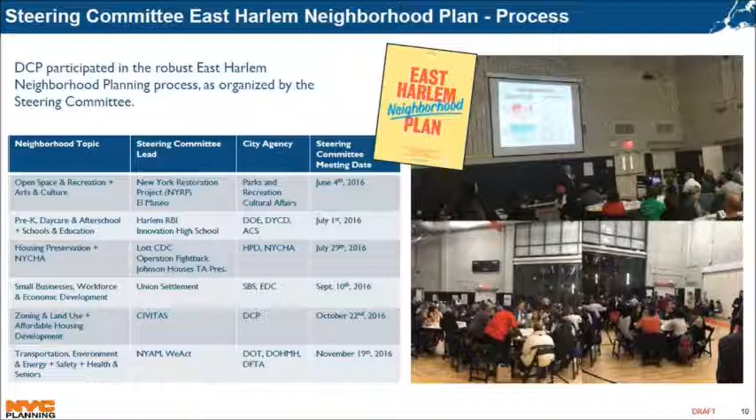And as you can see by the dates here, these are the various and numerous meetings that city agencies attended with community members to discuss some of the issues and concerns that were being raised by the community. As a result, there were 200 recommendations that were included.

And as you can see, these are the various topics that were included in the neighborhood plan. So the recommendations fell under these different topics. And as Eric stated earlier, this process differed from our other neighborhood studies, where it was an effort led by the community. They invited us in as city agencies to participate in this community-led process, which was very helpful, because through this process we were able to engage with the community and hear directly what these concerns were under these various neighborhood topics.

So now we'll talk about our approach. Once this plan was issued, the action that the city took.

Once the plan was issued, the engagement didn't stop. A lot of the agencies that were involved in the plan, that went to these meetings, continued to meet with the subgroups to discuss and come up with a plan of action for how the city can take actions for some of the recommendations included in the plan. These are our agency partners that participated in these subgroup meetings and continue to meet with the steering committee once the plan was issued to the city.

The amazing work that went into this plan provided a clear lens for the city to understand the work we needed to do in Harlem, as well as to identify how we need to use this plan as a guidepost for how we take action. In the next couple of slides, I'm going to walk through the recommendations included in the plan and highlight the work already underway by some of the agencies as an outcome of this ongoing engagement process.

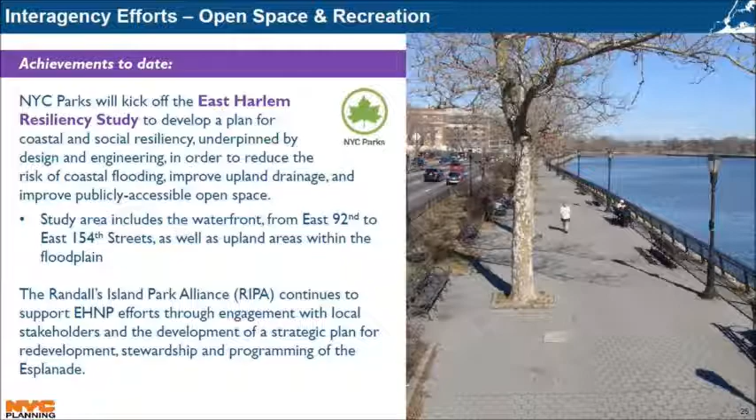In terms of transportation, environment, and energy, there were 6 recommendations included in the East Harlem Neighborhood Plan, focused on pedestrian safety and transportation infrastructure.

One of the projects mentioned by our colleagues at SBS is the plaza at East 125th Street. We find this to be a very important node for the district and for 125th Street itself, given its regional transportation potential. We want to make sure this is a good plaza that is being used and that people can access it safely.

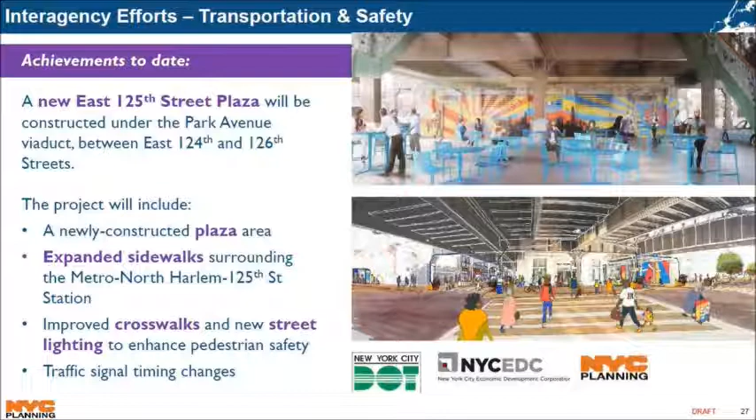There are improvements being made for the connections around this plaza to make sure it's safe, improving the timing of signals for access, and access between the Metro North Station and the plaza. There are also improvements along the Park Avenue Viaduct to ensure safety at various crossings, including curb build-outs and lighting in the tunnel, as well as improving services along the SBS Select Bus service line.

And then the last set of recommendations covers small business and workforce. I won't spend much time on this because our colleagues at SBS did a great job talking about the work they're doing in East Harlem.

But I just want to highlight the East Harlem Commercial District Needs Assessment. We took a look at these commercial corridors within East Harlem, identifying key issues and opportunities so that working with the community and our interagency partners, we can improve these corridors and make sure they are...

...at their full potential, as well as highlighting the new Workforce One Center, a satellite center that will be located in East Harlem to provide access and information about jobs that may be available to residents.

At this point, I'm going to turn it over to my colleague Eric to talk about our rezoning proposal. I just want to highlight that we're being responsive to the recommendations, and we want to show where we're aligned with the East Harlem Neighborhood Plan, and the other areas where we build off those recommendations to really take this targeted approach in East Harlem. So I'll turn it over to Eric now.

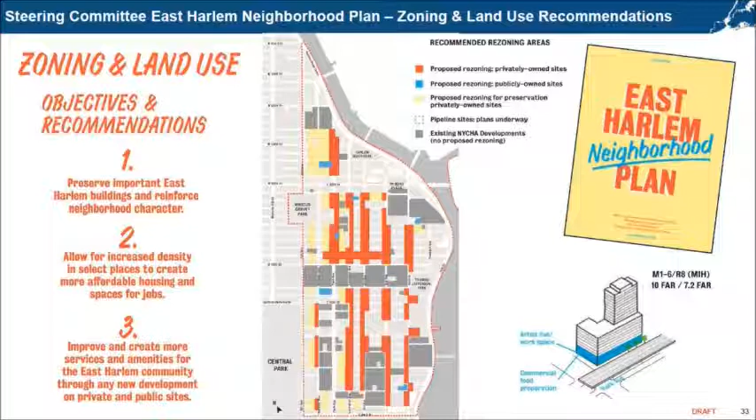It included several maps, helpful graphics, detailed tables, charts, as well as massings that helped illustrate their preferred building forms. On the bottom right corner of the slide, you can see a massing included in the community's plan. This shows a massing they would suggest for Park Avenue with a 10 FAR non-contextual building form featuring commercial food preparation and artist-live workspaces on lower stories adjacent to the rail.

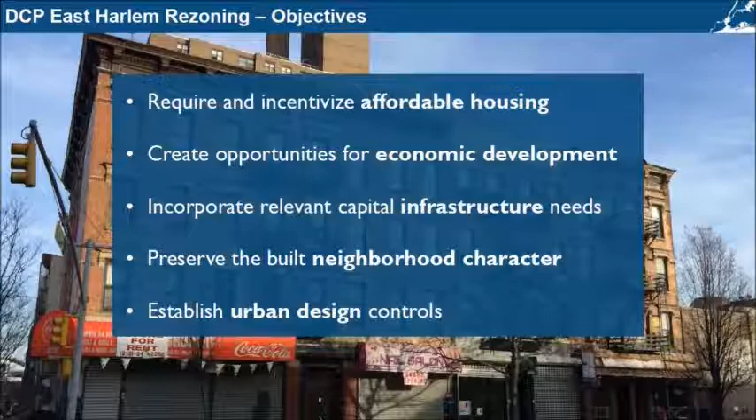I want to give another reminder of our objectives for our rezoning proposal here. As you might notice, these objectives are quite similar to the objectives in the community's plan. We had also a major focus on increasing affordable housing through MIH, creating opportunities for economic development and jobs, and preserving the built context and character of the neighborhood.

We took a similar approach when we received the recommendations and began our work. We started with a look at the entire neighborhood, pretty much all of Community District 11, with the exception of Randall's Island. We conducted several analyses of existing land uses, buildings, and zoning under a variety of scenarios. These rounds of analysis really allowed us to hone in on specific opportunity areas. Many of these areas had a combination of outdated zoning and also real opportunity for the zoning actions to result in new housing, jobs, and economic development.

We think this is a sensitive, balanced, and responsive plan. Just by looking at the map, I think it's clear that we have not employed a broad brush approach here. We've gone block by block, really, to look at existing conditions and develop zoning moves that address our shared objectives with the Steering Committee in a very fine-grained way.

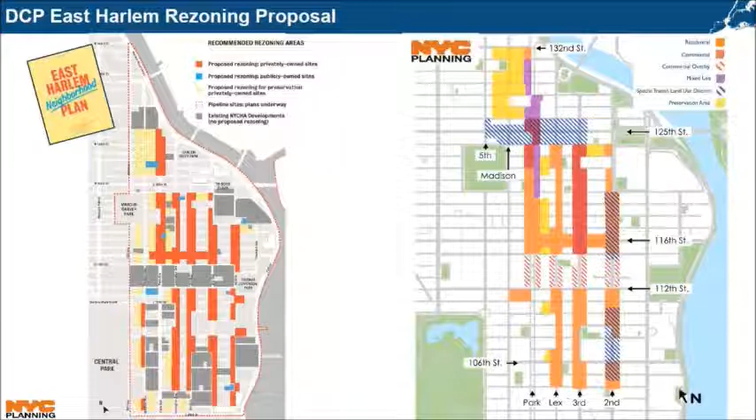Let's go ahead and dive in by taking a look at the Park Avenue corridor. Along Park Avenue, we've developed a mixed-use approach that takes advantage of one of the neighborhood's main assets, which is the transit node at 125th and Park, where the Metro North has a station and where the future 2nd Avenue subway terminus will be located.

This is an area that could become a major commercial center for Upper Manhattan and for the region as a whole. Our proposal would allow existing businesses to expand and would also permit new job-generating uses to locate near this transit hub. We proposed several higher density districts at 125th Street, radiating to the north and south for several blocks. Beyond those points, we proposed lower density districts, both to the north and to the south.

There are light manufacturing activities here today, and we believe these uses should be able to expand. We also believe that new light manufacturing, office, life science, and other commercial uses are particularly appropriate for Park Avenue. We've actually gone a step further here, and in many areas are actually requiring that a portion of new buildings contain these types of uses. The zoning will essentially guarantee that Park Avenue is a truly mixed-use area.

Of course, the zoning also permits housing, and as in all areas where we're proposing increased density, the mandatory inclusionary housing program will be mapped here to require permanently affordable housing.

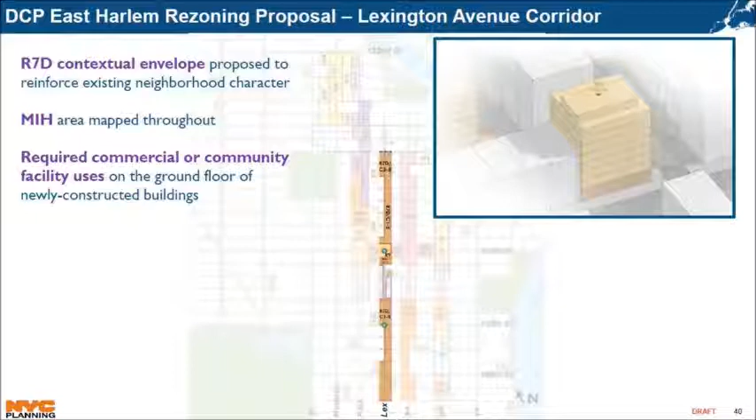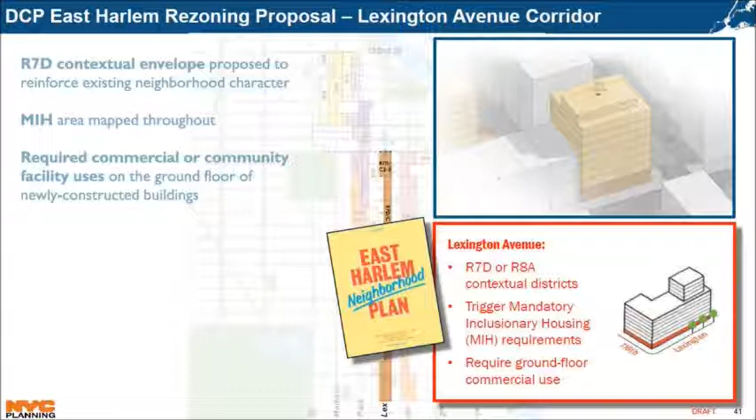The massing included in the community's plan rises to approximately 12 stories, with the bulk of the floor area located in the base of the building. We've also included other steering committee recommendations for MIH and required ground floor commercial use, though our proposal would also allow community facility on ground floors.

So moving on to 116th Street. Similar to Lexington Avenue, we proposed R7D along much of East 116th Street, with the exception of the avenue intersections. Recall that buildings in R7D districts rise no taller than 11 stories.

As I mentioned a moment ago, we proposed a higher density district. We proposed an R9 district at the intersection at Lexington Avenue, adjacent to the existing 116th Street stop on the Lexington Avenue Local 6 line. The illustrative massing here shows developments that we could expect at that particular node.

Under the proposed non-contextual R9 district, we could expect buildings ranging from 9 to 17 stories at this node. This transit-oriented strategy is consistent with our general approach of selectively targeting density in areas of opportunity close to transit. We've also proposed the same ground floor commercial or community facility requirements seen elsewhere in the rezoning area, in addition to MIH.

Again, with the exception of the avenue intersections, we more or less mirrored the recommendations for 116th Street in the steering committee's plan. Note that while we treated the intersection of Lexington and 116th Street a bit differently than what was recommended in their plan, the steering committee has been quite receptive to a higher density at that particular node. Along the mid-blocks, we arrived at the lower of the two densities suggested by the steering committee, with the same MIH and ground floor commercial requirements suggested for Lexington Avenue.

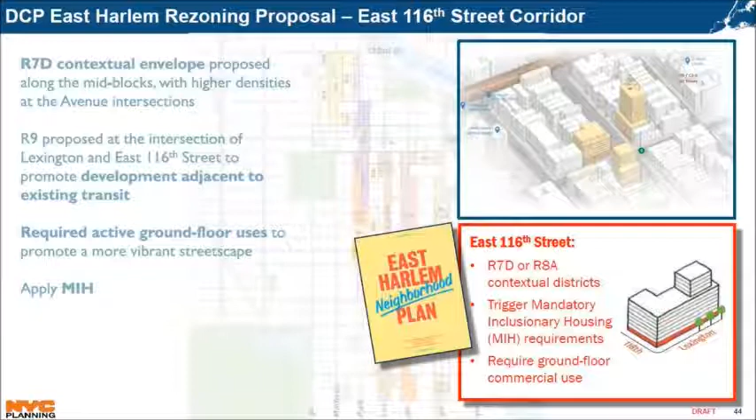So next we'll focus on the 3rd Avenue corridor.

As we've mentioned previously, Third Avenue has a wide street condition and is located just one block away from subway stations planned for Second Avenue. We found that these unique conditions contribute to the avenue's capacity to accommodate additional density, and we believe it's appropriate to map higher density in these areas of opportunity adjacent to existing and future transit options.

As you can see in the massing on the top right in the blue box, you can see a few buildings that we could expect to develop under the proposed R10 and R10 equivalent densities. Using reasonable development assumptions, no development on Third Avenue would be expected to exceed the height of the Taino Towers development, which tops out at about 330 feet. We would expect most buildings along Third to rise to between 15 and 30 stories.

For the northern section of Third Avenue, our proposal would maintain the existing commercial density, permitting the same uses as existing C4 districts mapped along the corridor today. Upper story commercial and community facility uses would continue to be allowed under our proposal. We've also proposed enhanced commercial regulations that will reinforce the existing retail character of the corridor and create a more desirable pedestrian environment. These include requirements for transparent materials on storefronts, restrictions on curb cuts, limitations on the width of residential lobbies, as well as the previously mentioned requirement for ground floor commercial or community facility.

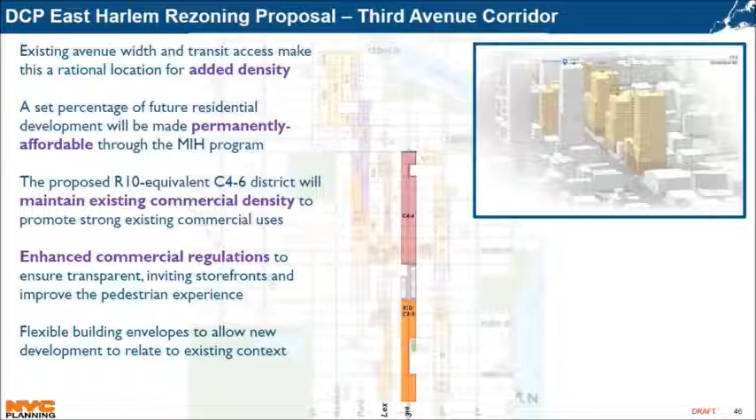The steering committee recommended either R9 or R9A districts along most of the corridor, and considered either R9 equivalent or R10 equivalent commercial districts closer to the 125th Street corridor. As you can see in the community's plan massing on the bottom right here in the red box, the massing is approximately a 20-story building with a tower and base-like form.

Density along Third Avenue was one of the primary differences between the steering committee's recommendations and our proposal. Our analysis really drove home that Third Avenue was the area with the most opportunity to achieve the goals we share with the steering committee. The corridor will be located between two major transit lines once the Second Avenue subway is up and running, and the scale of the avenue can easily accommodate buildings that are more proportional to the width of the avenue. We selected lower densities in other locations with a higher density on Third Avenue to arrive at a balanced plan that we believe would best accomplish the larger package of objectives we share with the steering committee.

In any case, the steering committee's recommendation to map MIH along Third Avenue would be implemented with our proposal, as would their recommendation for enhanced commercial requirements.

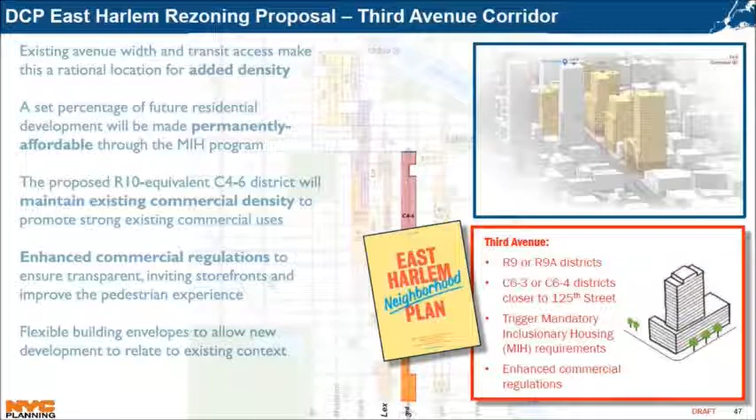Moving east to Second Avenue, we proposed R9 districts with MIH requirements in existing R8A districts along Second Avenue.

We also re-examined the special transit land use, or TA districts, that were originally mapped along the avenue in the 1970s. As a reminder, these districts are intended to relate new development to future subway infrastructure. We updated the locations of the TA districts in East Harlem to match the MTA's current plans for the Second Avenue subway. We also amended the TA district text to exempt floor area related to subway infrastructure from zoning calculations, which encourages mixed-use developments that include subway infrastructure within the building, with the added benefit of making the streetscape more desirable for pedestrians.

Typically, extra height is needed to allow buildings with lower story subway infrastructure to utilize their full as-of-right floor area. You can see the massing in the upper right in the blue box; this is what a building could look like with that subway infrastructure on lower stories along Second Avenue. While this particular building would rise to about 25 stories, we would expect most buildings along Second Avenue to rise to between 8 and 18 stories.

Could I just ask, what's the southern boundary? The southern boundary is East 104th Street. Wonderful, thank you.

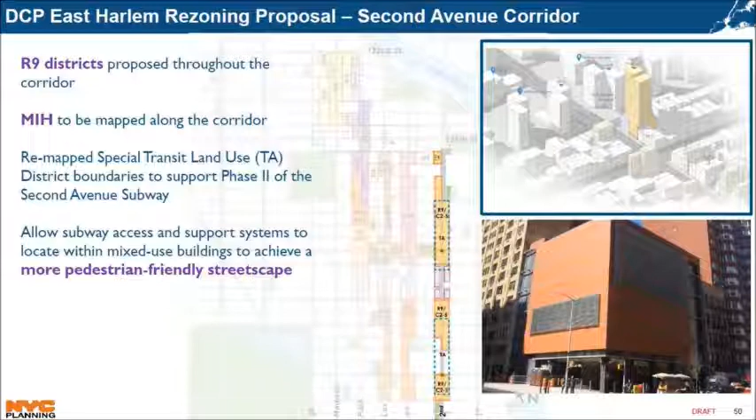So here on the bottom right, we've included an image of standalone subway infrastructure that you can see further south on Second Avenue and the Upper East Side. Note the blank building walls, which have a negative effect on a vibrant streetscape, and you can also see there's a lost opportunity for upper story residential units here. Our proposal is really designed to avoid this type of infrastructure in East Harlem.

So the steering committee again recommended R9 or R9A districts along this particular corridor, going further to recommend higher density commercial districts closer to 125th Street. In the red box, you can see that the steering committee prefers the same sort of 20-story tower and base massing that we saw for Third Avenue.

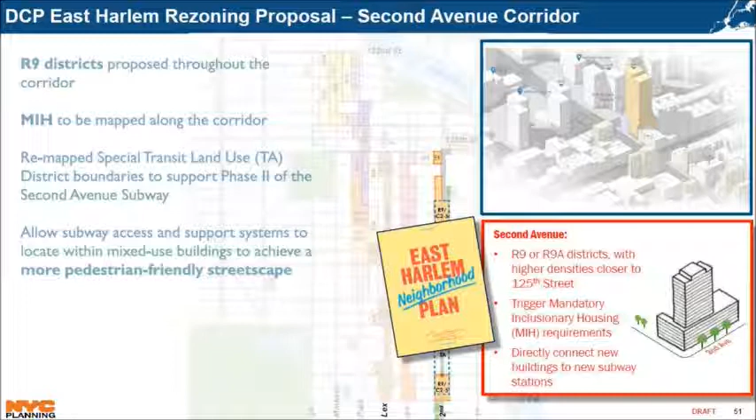We actually decided to maintain that R9 equivalent density on the northern portion of the avenue, where the steering committee contemplated either R9 or R9A due to changes in the planned locations of Second Avenue subway platforms. Our proposal includes non-contextual R9 districts for Second Avenue, one of the options proposed by the steering committee. We concluded that contextual districts would make it difficult to construct mixed-use buildings featuring subway infrastructure, and we found that flexibility here is really needed to accomplish our infrastructure goals. Nonetheless, contextual building envelopes would still be an option here. Other community recommendations related to MIH and subway connectivity have been addressed by our proposal.

Do we know approximately how many people live in the area now? In the entire neighborhood? In the entire area that we're discussing? In the entire neighborhood, there's 120,000 residents.

But I'm not sure what percentage of them would you assume is in an MIH mode? Or putting it differently, what percentage of those 120,000 people would there be who are currently not at area median, that are under area median income? Is that... so we have a slide,

I'll tell you where I'm going. You got 120,000 people in the area now. At anticipated build-out, if the proposed plan were passed, how many units would there be? So our increment is close to 3,500 new dwelling units that would be coming to East Harlem.

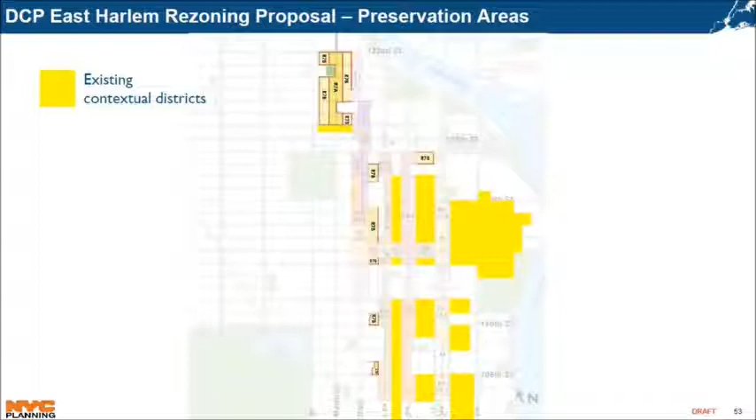You can see the combination of our proposed preservation areas, and in the highlighted yellow color, you can see the existing contextual districts that exist in East Harlem. These districts were primarily mapped during the 2003 rezoning effort, and as you can see, they cover a significant chunk of the eastern portion of the neighborhood. Combined with our proposal, these ensure the preservation of existing building form throughout a very large swath of the neighborhood and in the most appropriate areas.

As I just mentioned, we propose contextual districts to preserve neighborhood character and also to prevent development that could be inconsistent with the established scale and context of these areas. We propose R7A districts along wide streets, with R7B districts along narrow streets, as these districts were intended to be mapped. These proposed preservation districts provide a counterweight to the rezoning approach in other areas of the neighborhood, contributing to a balanced overall plan that recognizes areas with a consistent and unique local character.

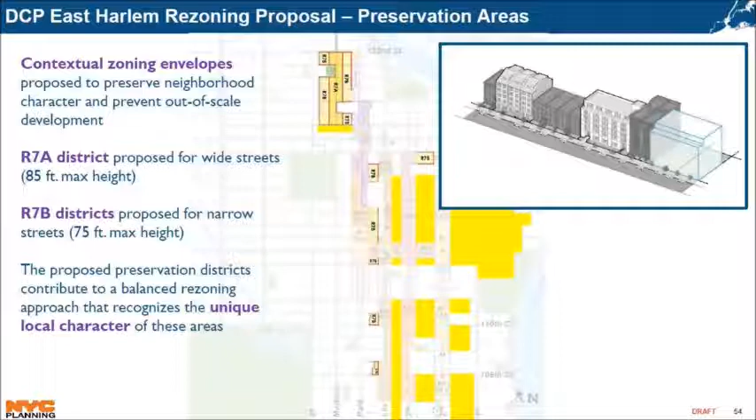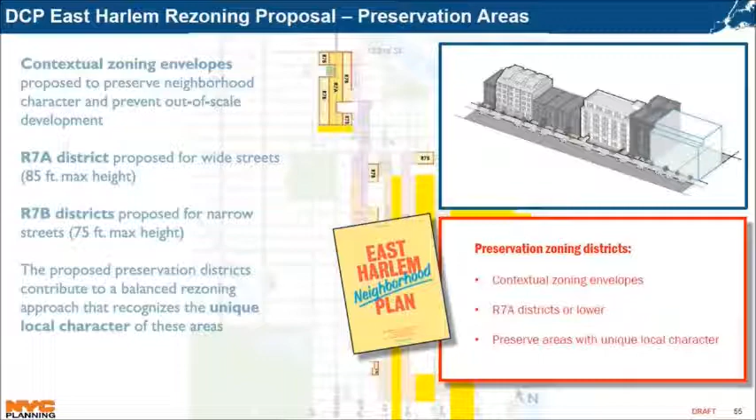Within these areas, the community's plan called for contextual zoning as well, specifically R7A districts or lower. Our proposed mid-block R7B districts have a lower density than R7A, which was only proposed along Madison Avenue. Again, we were respectful of the steering committee's recommendations here, going so far as to propose a lower density to ensure the desired preservation outcomes would be achieved with a more sensitive approach. Particularly when combined with existing contextual districts in East Harlem, our preservation recommendations are another strong component of our balanced and targeted plan.

So I'll quickly finish this section with just a rundown of the proposed actions. I will not talk about these very much. You have a lot of information in your packets. If you have any other questions, we're happy to answer them.

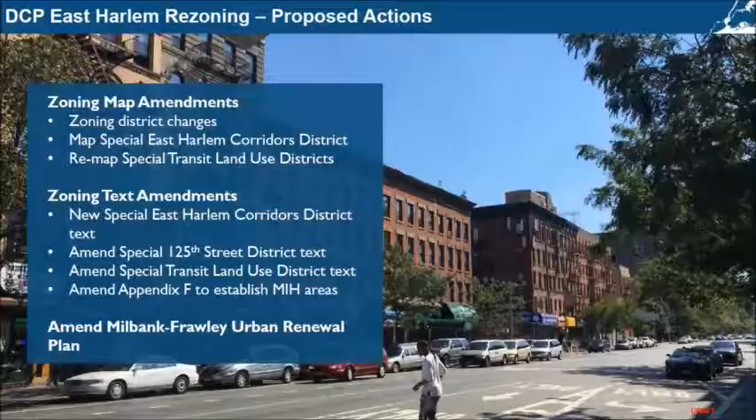All right, thank you. So this is coming back for pre-hearing. During the public review process, which was a very passionate process, I will say, very passionate, Community Board 11 held two public hearings, one at the beginning of the process and one at the end. On June 20th, at their public hearing, they issued a resolution to disapprove with conditions. The Manhattan Borough President held a public hearing on July 16th.

And following on August 2nd, issued a resolution to disapprove. Many of the community board conditions and comments noted in the borough president's resolution overlap, and they fall into several broad categories, which I'll go through in these slides.

First, going over the zoning and land use recommendations. The recommendations were to generally limit increase in density to R9 equivalents. There were comments about geography of the zoning changes, with several recommendations to include certain areas in the rezoning boundaries and others to exclude areas that were included, and include areas that were excluded.

And then there were also comments about the retail regulations, parking garage regulations, and relocation of subway stairs at a single subway stop, specifically at the East 116th and Lexington Avenue node.

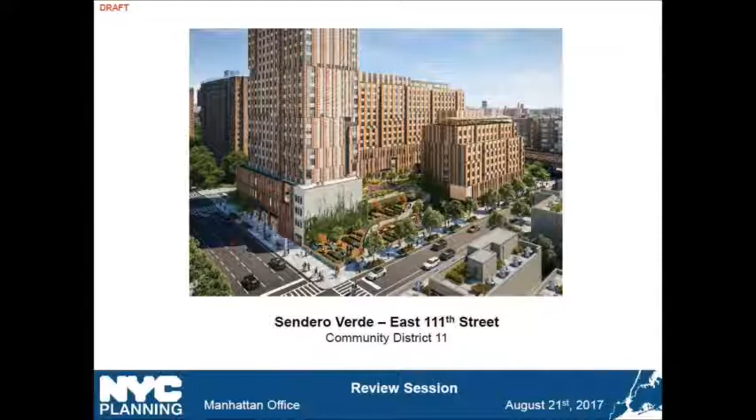Good afternoon, Commissioners. This is an application by the New York City Department of Housing Preservation and Development for a number of discretionary actions, which will be discussed in greater detail later in the presentation, to facilitate the development of 3 mixed-use buildings with residential, commercial, and community facility uses.

The project area is an entire block bounded by Park Avenue, East 111th Street, Madison Avenue, and East 112th Street, and is currently zoned R7-2 with C1-4 commercial overlays on the Park and Madison Avenue frontages.

The project area contains approximately 76,576 square feet of lot area, and the majority of the project area is contained within city-owned parcels, as shown outlined in red. The remaining 2 lots located on the project area are privately owned and are not part of the development site. Lot 21 is improved with a single 4-story building, and Lot 34 is currently utilized for surface parking and storage.

In prior years, part of the development site was used as a baseball field by the East Harlem Little League under a temporary license agreement with HPD. The license agreement expired in October 2016, and the East Harlem Little League has obtained a permit through the Parks Department to play on a nearby Parks Department field. The lots previously licensed to Little League are currently vacant.

The development site currently contains 6 interim Green Thumb community gardens located on city-owned parcels along the Park and Madison Avenue frontages. These interim gardens operate under a temporary license agreement with HPD and have allowed for garden-related activities until a viable development scenario can be achieved for the site.

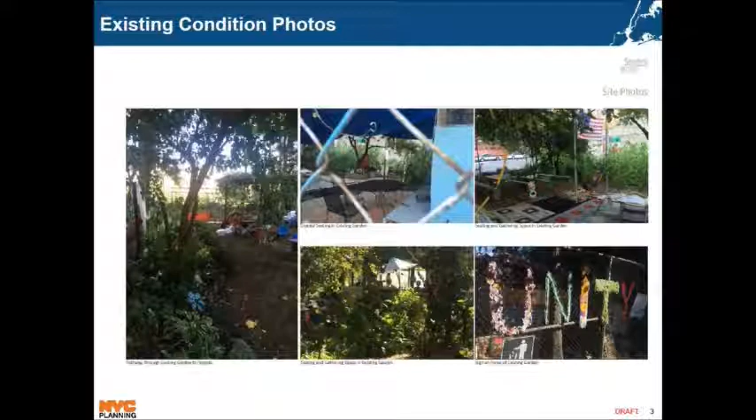The proposed development includes the construction of 3 predominantly residential mixed-use buildings on the development site, ranging in height from 10 to 37 stories. The proposed development will occupy all frontages on the block not otherwise owned by the non-city-owned parcels discussed previously.

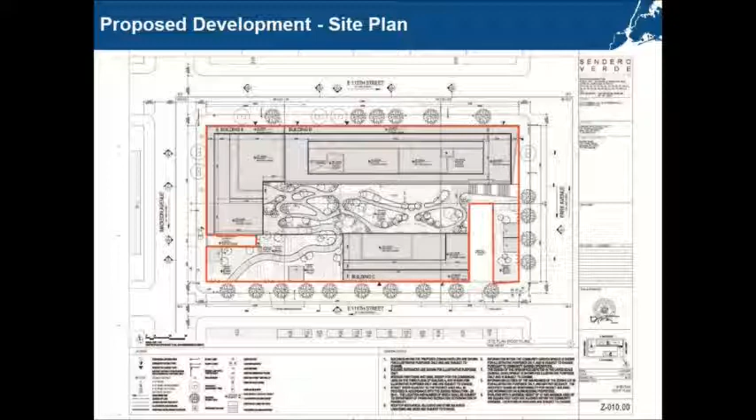In total, the proposed development contains approximately 718,500 square feet of floor area, of which approximately 544,000 square feet will be residential, 32,200 square feet will be commercial, and 142,200 square feet will be community facility floor area.

The 3 predominantly residential buildings will contain approximately 655 affordable housing dwelling units, with a proposed mix of 152 studios, 243 one-bedrooms, 161 two-bedrooms, and 99 three-bedroom units. The units will provide housing for individuals and families at a mix of incomes between 30% and 130% of Area Median Income, or AMI. No accessory parking will be provided as part of the proposed development.

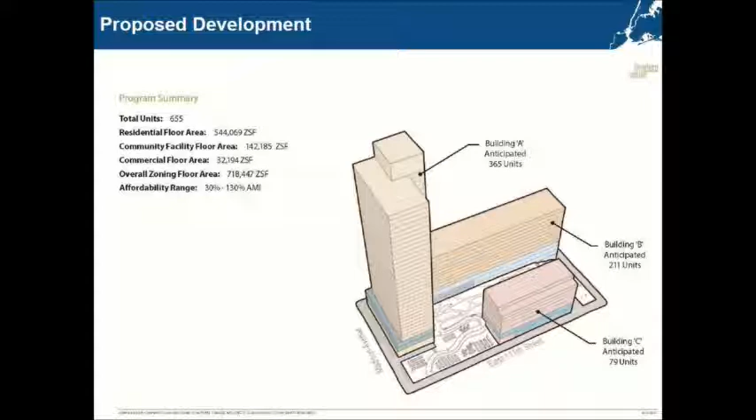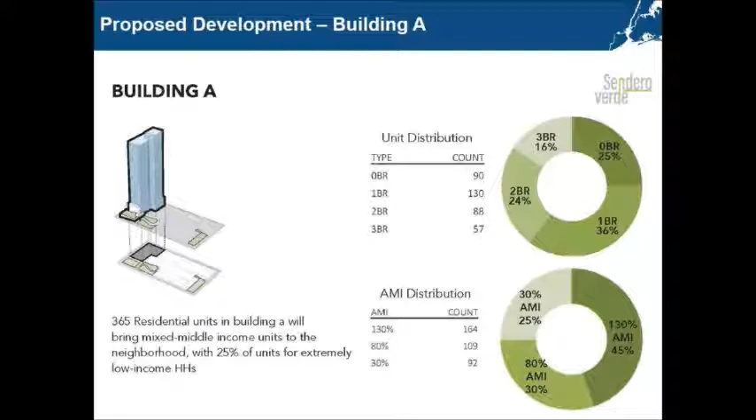Building A is proposed to be located at the intersection of Madison Avenue and East 112th Street and is proposed to rise to 37 stories. Building A will contain approximately 365 residential units, as well as community facility floor area and commercial floor area, which will include a local supermarket. Of the 365 residential units, it is proposed that 164 units will be provided at 130% of AMI, 109 units at 80% of AMI, and 92 units at 30% of AMI.

Building B is proposed to be located along the remainder of the East 112th Street frontage and wrap along the Madison Avenue frontage for a depth of approximately 72 feet, rising to a height of 15 stories. Building B will contain approximately 211 residential units, as well as community facility floor area, which will include the Dream Charter School. Of the 211 residential units, it is proposed that 127 units be provided at 60% AMI, 30 units at 50% AMI, 32 units at 40% AMI, and 22 units at 30% AMI.

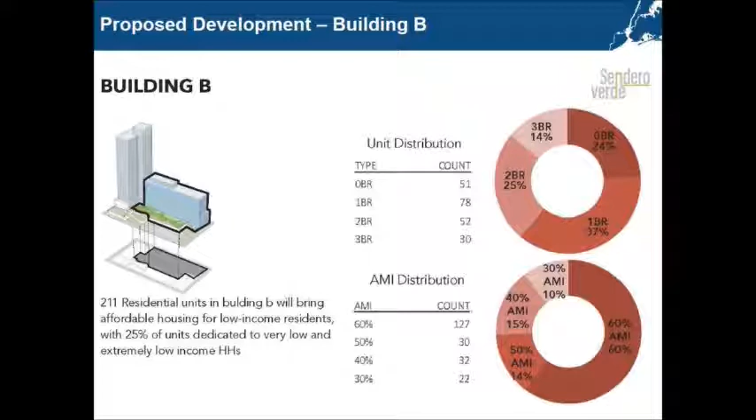Building C is proposed to be located on the mid-block frontage of East 111th Street and is proposed to rise to a height of 10 stories. Building C will contain approximately 79 residential units and community facility use. Of the 79 residential units proposed for Building C, it is proposed that 47 units be provided at 60% AMI, 12 units at 50% AMI, and 20 units at 30% AMI.

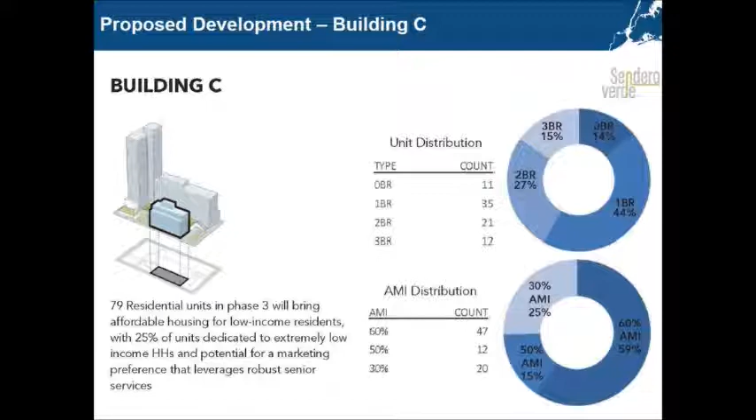Buildings A, B, and C will be built to passive house standards, which exceed LEED standards.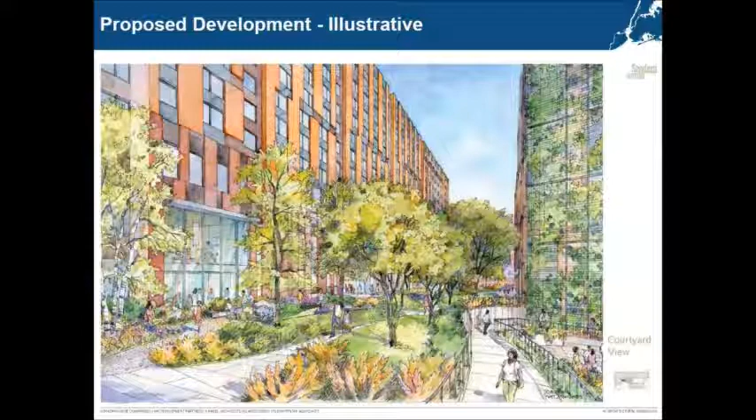The proposed buildings will form an approximately 17,000 square foot courtyard within the center of the proposed development and will provide passive landscape recreation space, proposing to include features such as a medicinal garden, seating, and general green space.

Public entrances to the courtyard will be provided along Park Avenue through a staircase and elevator. The staircase will be right over here and the elevator will be directly adjacent to it, as well as along East 111th Street through an ADA accessible ramp seen right here.

The courtyard will also be accessible through rear entrances adjoining community facility spaces, through Building B and through Building C.

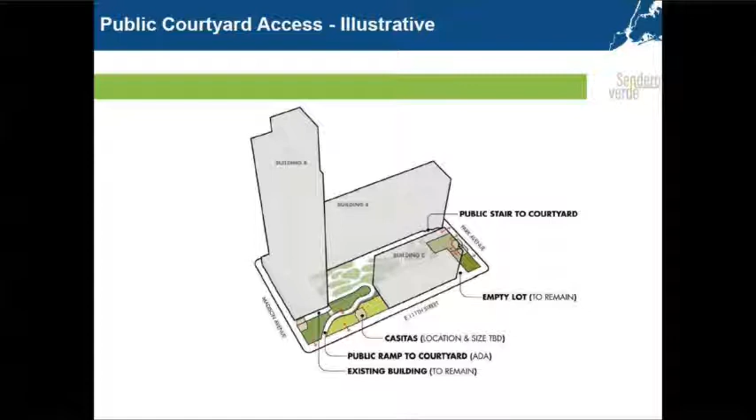The garden area will accommodate approximately 4 of the existing interim Green Thumb gardens. The remaining 2 community gardens located on the development site have been offered relocation sites on other nearby existing Parks Department gardens pursuant to the garden rules.

A dedicated community room and a bathroom, which will be available to all members of all 4 gardens, will be located within Building A. An additional bathroom will be located adjacent to the community gardens on Park Avenue.

Additionally, the public pathway will pass through the gardens located on East 111th Street, connecting to the interior courtyard, which must be maintained by the owner of the proposed development and remain accessible to the public during daylight hours.

The applicant seeks a zoning map amendment to change the project area from an R7-2 district with C1-4 commercial overlays along the Park and Madison Avenue frontages to an R9 district with C2-5 commercial overlays along the Park and Madison Avenue frontages. The applicant also seeks to amend Appendix F of the zoning resolution to establish a mandatory inclusionary housing area over the project area.

The applicant is proposing to utilize Option 1 and the deep affordability option.

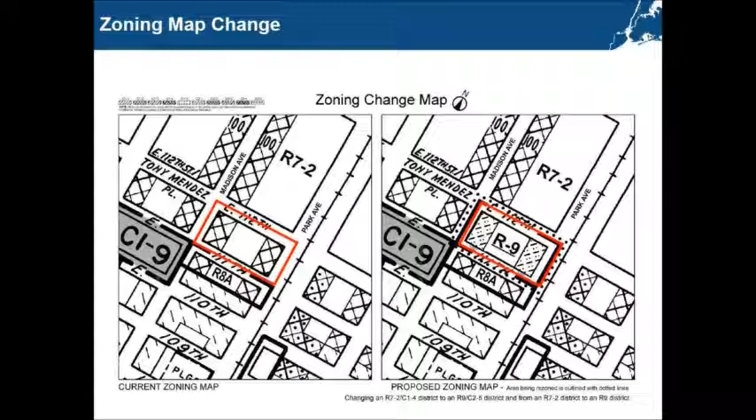The applicant is also requesting approval of an urban development action area and project approval, as well as the disposition of city-owned property. The applicant requests to acquire a portion of the disposition area for use as community garden space and a publicly accessible path.

The garden area and path portion will be acquired by the city upon or before project completion, including completion of construction of the garden area and path.

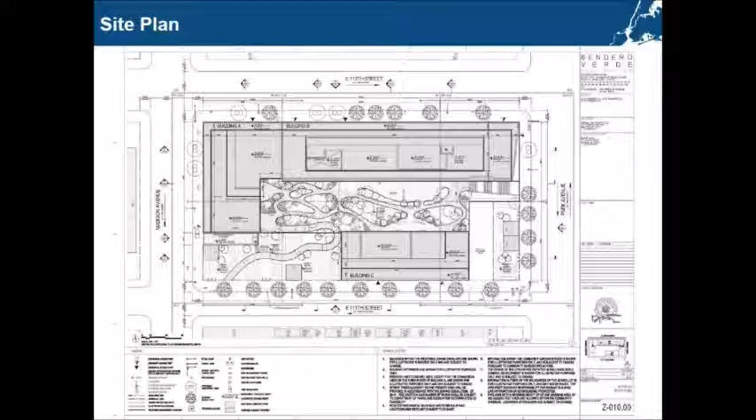The applicant is seeking a special permit from the City Planning Commission pursuant to Section 74-743 to modify the bulk regulations within a large-scale general development, to modify height and setback regulations, and yard requirements applicable to the proposed development. The requested modifications are detailed in the briefing materials provided for you.

The applicant requests a special permit from the City Planning Commission pursuant to Section 74-532 to waive up to 129 accessory off-street parking spaces, and a special permit pursuant to Section 74-744B to permit commercial use to be located above the level of the second story in a mixed-use building, to permit healthcare-related offices to be located on the third level of Building A.

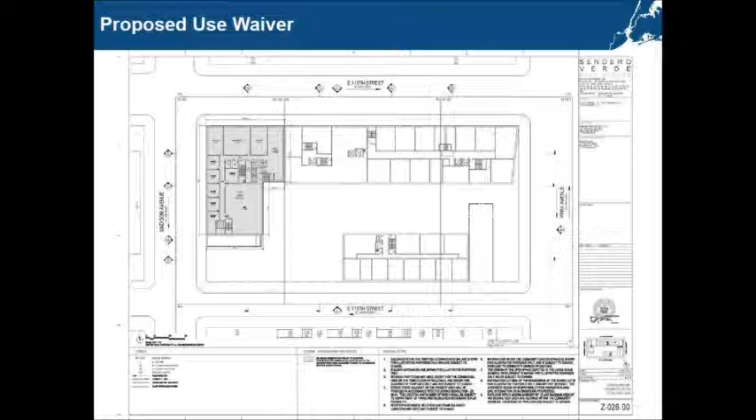The applicant also requests a special permit pursuant to Section 74-532 to waive up to 129 accessory off-street parking spaces required in connection with the up to 322 units affordable to families earning over 80% AMI within the proposed development.

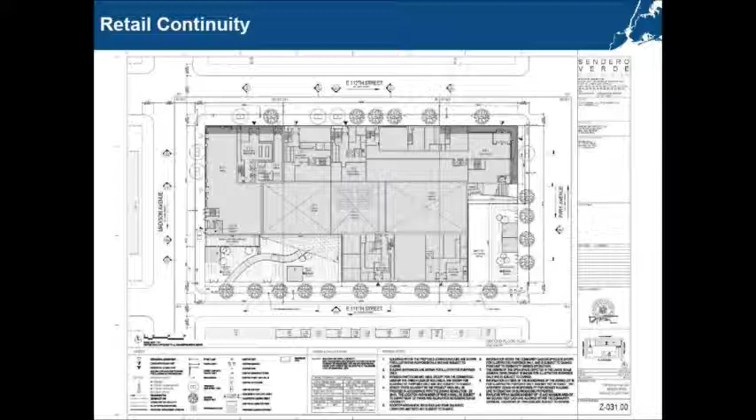Finally, the applicant requests a certification from the City Planning Commission pursuant to Section 32-435 to waive the requirement that a minimum of 50% of a building wall facing upon a wide street be occupied at the ground level by commercial uses.

These applications were referred to Community Board 11 on April 21st. At a special full board meeting on June 27th, the board voted to recommend approval of these applications with 29 in favor, 5 opposed, and 3 abstaining.

This was on the condition that the development be 100% permanently affordable, that the developer make a commitment to hire locally, that the affordability levels be deepened, and that the highest affordable units be distributed amongst all 3 buildings, that the open space be accessible to the public in perpetuity, and that appropriate public space signage be provided.

Also, that any community partners be approved by the community board, that the site and the development be made ADA compliant, that additional safety training and security monitors be provided for a safe construction site, and for the developer to provide the community board with quarterly updates.

The borough president recommended approval of these applications on the condition that the development team work to reach deeper levels of affordability, that the development team make extending the duration of time that units that are not permanently affordable remain affordable by partnering with nonprofit developers and studying the use of restrictive covenants on the deeds.

And that the design result in prominent and distinctive buildings that complement the character of the surrounding area, and that the development team provide regular updates to the community board.

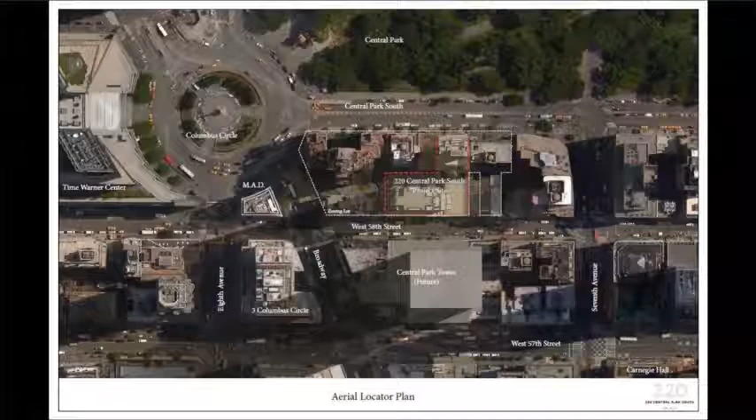The development occupies this L-shaped portion of this larger zoning lot, so the development's in red, larger zoning lot in white, which occupies most of the block bounded by Central Park South to the north, 7th Avenue to the east, West 58th Street to the south, and Broadway and Columbus Circle to the west.

Central Park South, here to the north, is a wide street that carries traffic in both directions. West 58th Street, here to the south, is a narrow street that carries eastbound traffic, and then both 7th Avenue and Broadway are wide streets that carry southbound traffic.

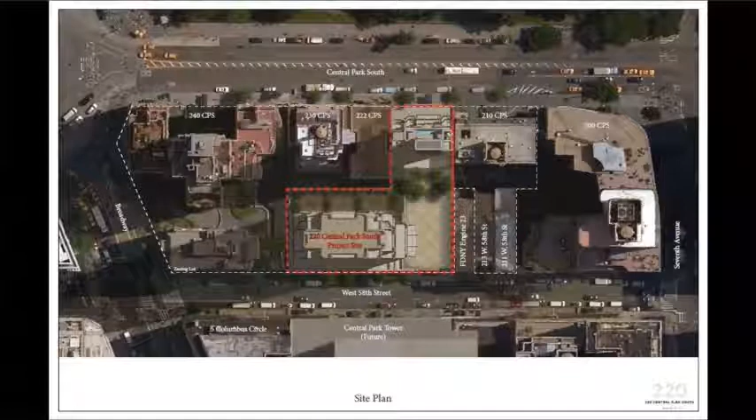The portion of the proposed development on Central Park South will rise to about 240 feet, and that's the villa. And then on the West 58th Street side will be a 950-foot tower.

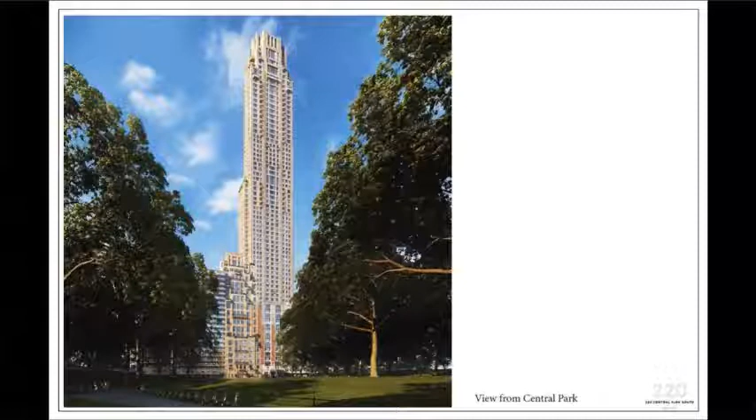And then, as we saw, here's the villa component here, on Central Park South, and behind it is the tower. As I mentioned, at certification, an as-of-right development containing 118 units and 24 parking spaces is currently under construction.

So while the proposed development is mostly as-of-right, the applicant is seeking a special permit to allow an increase in the number of parking spaces from the as-of-right amount of 24 to 64, and a joint certification by the commission and the DOT to allow 2 additional curb cuts on the narrow street frontage, the West 58th Street frontage of the zoning lot.

There was a question at certification about the gates. I should clarify that the gates will be open during the day, and then late night, the gates will be closed. Drop-off would take place on the curb, and drivers would have a remote in their car to open the door. This is late at night, after midnight.

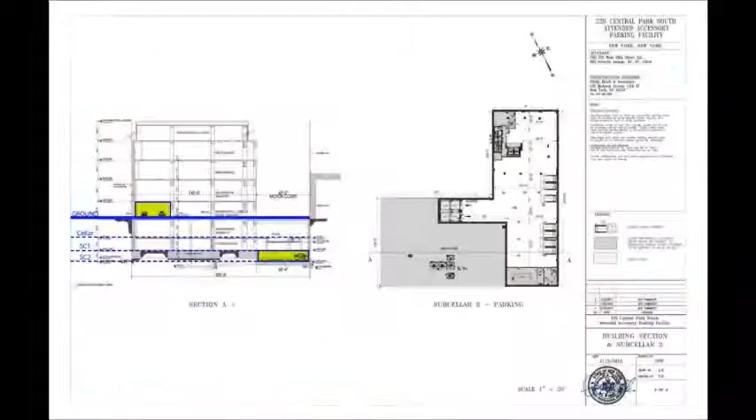Taking a section through, here's the ground floor and the entrance to the facility. We're looking this way, cutting through, looking north. Vehicles enter on the ground floor and take an elevator down to the subcellar level where the 64 spaces will be, with 57 on the surface and 7 elevated.

These 64 spaces will replace 173 spaces that previously existed on the site. As part of the request for the special permit to increase the number of parking spaces from 24 to 64, the applicant examined the change in residential units and residential parking spaces between 2005 and 2018 within a third of a mile of the site, both with and without the project.

I should note that prior to the department referring the application to the community board, staff noticed that the growth study did not account for the loss of residential units on the site, and also did not identify another development, the Roseland development at 242 West 53rd Street, which the commission considered in May.

Previously, the growth ratio without the project was 9.78%, and with the project was 10.26%. With the revisions included in your package, the ratio without the project is now 15.53%, and with the project is 16.5%. The number of additional parking spaces being requested, going from 24 to 64, has not changed, so these revisions do not affect the extent of the applicant's request.

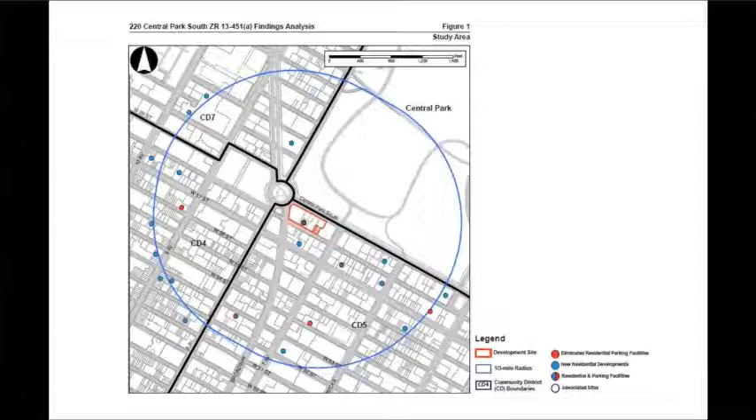Moving on to the certification: only one curb cut is permitted on a narrow street frontage of a zoning lot. Here's the proposed parking entrance, and here's the motor court entrance. Again, West 58th carries eastbound traffic.

Currently, there are 4 curb cuts on the narrow street frontage of the zoning lot. We have 3 here in front of the development site and 1 just to the west serving a trash storage facility for this residential development.

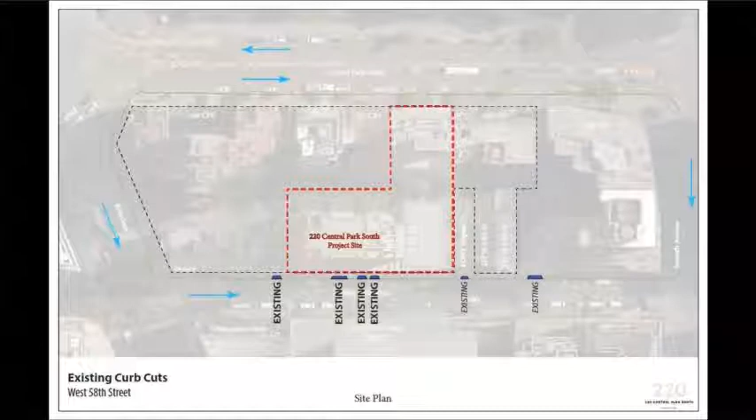But since the zoning lot is over 30,000 square feet, additional curb cuts on the street may be permitted along this narrow street frontage, provided that the Commission and the Department of Transportation certify that these additional curb cuts will not result in conflict between pedestrians and vehicular circulation, and will result in a good overall site plan.

The special permit was certified on June 19th and was referred, along with the application for the joint certification, to the Community Board. On July 14th, Manhattan Community Board 5 held a public hearing, and by a vote of 32 in favor, 3 opposed, and 1 abstaining, issued a resolution recommending approval of both applications.

On August 14th, the Manhattan Borough President issued a letter recommending approval of the special permit. In that letter, the Borough President reiterated her concern for the parking methodology that she has expressed in recommendations for other parking special permits the Commission has considered, and once again urges the Commission to reconsider the parking calculation methodology to include a more robust set of factors.

The Borough President did not comment on the application for the certification. In addition to the edits in the briefing and to the growth ratio, the application materials were updated to include the 60-foot curb cut across the street on West 58th Street, the Nordstrom Tower. Previously that was not included in the materials, and now the drawings and narrative are updated to include that curb cut.

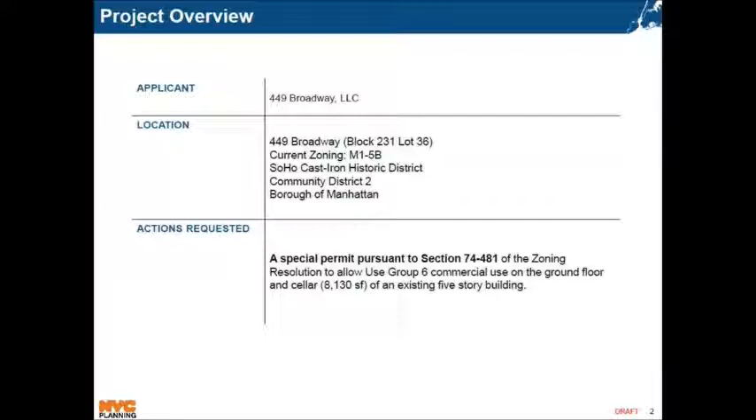The property, outlined here in the blacked out line, is located on Broadway between Howard Street to the south and Grand Street to the north. The underlying zoning district is M1-5B, which permits light industrial and commercial uses as of right. Use group 6 retail uses are not permitted as of right below the level of the second floor.

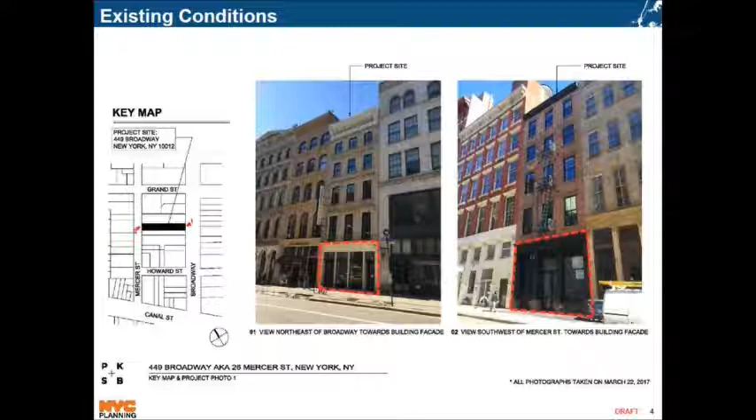At the review session, I went through the marketing efforts. Just for the sake of time, I've cut down the presentation, but if there are any further questions on this, please let me know.

At its full board meeting on July 20th, Manhattan Community Board 2 voted unanimously in favor of a resolution recommending approval of the application. We have not yet received the Borough President letter. It is due today, and as of 15 minutes ago, I had not yet received it. I've been told it will be in by the public hearing, and I will include that as a memo. That concludes my presentation.

Questions from commissioners? Thank you. This goes to the public hearing on Wednesday.

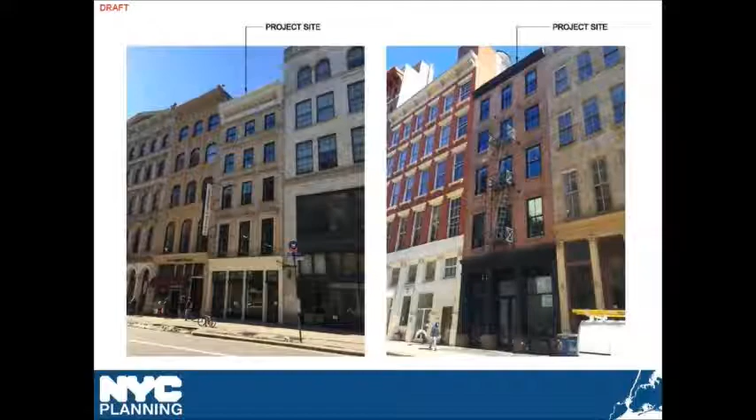Annie will also present the next item, item number 9 on page 775, a zoning text amendment to establish C6-7 signage regulations for specific lots in the 8th Avenue corridor of the Special Theater Subdistrict, Community District 4, Manhattan. Item number 9, page 775. Please note for the record that Commissioner Knight is recused.

Hello again. As Hannah said, this is an application for a text amendment to allow signage provisions for a site at the corner of 42nd Street and 8th Avenue in the Special Midtown District, Community District 4, Borough of Manhattan. The applicant is Midtown Equities LLC, and it is a text amendment to modify signage provisions to allow C6-7 signage rules to apply in an underlying C6-4 district at a property at 661 8th Avenue.

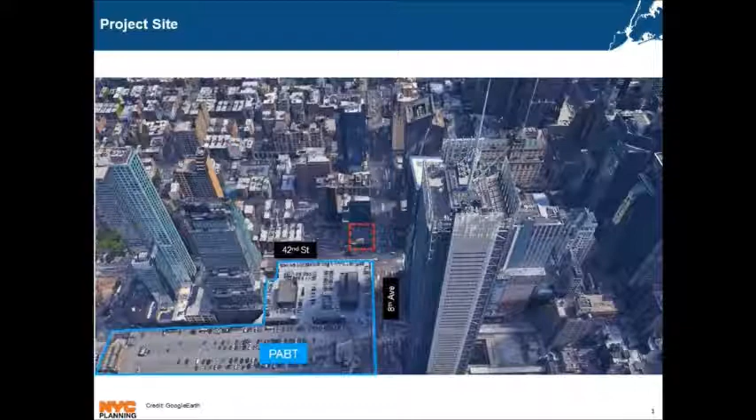The project site outlined here in the red dashed line is currently a 2-story retail building with accessory non-illuminated signage. It is located directly north across 42nd Street from the Port Authority bus terminal, shown in blue outline on this image, and just west of Times Square.

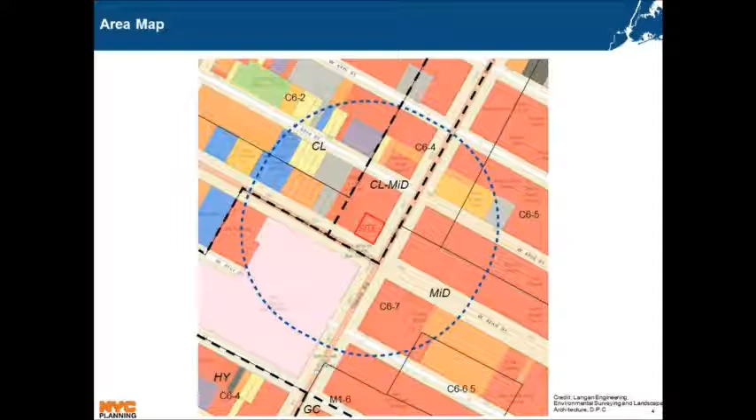The applicant seeks this text amendment to facilitate the installation of an illuminated advertising sign on the roof of an existing 2-story retail building. The proposed signage would face southeast into Times Square.

This proposed C6-7 signage regulation would allow accessory and advertising signage. There is no size limitation and no limits on height above curb level. The text amendment will create a new section in the theater subdistrict which further specifies the C6-7 underlying regulations, so that the signage may not produce sound and the illuminated signs may only face diagonally to face both wide streets into Times Square, or to face one of the wide streets. This is to avoid any illumination facing west or north into the residential Clinton neighborhood.

There are also additional locational requirements, so it will only apply to specific corner lot portions of zoning lots bounded by 2 wide streets within the special districts. So really, within the area of the red dashed line in this image is the only applicable area.

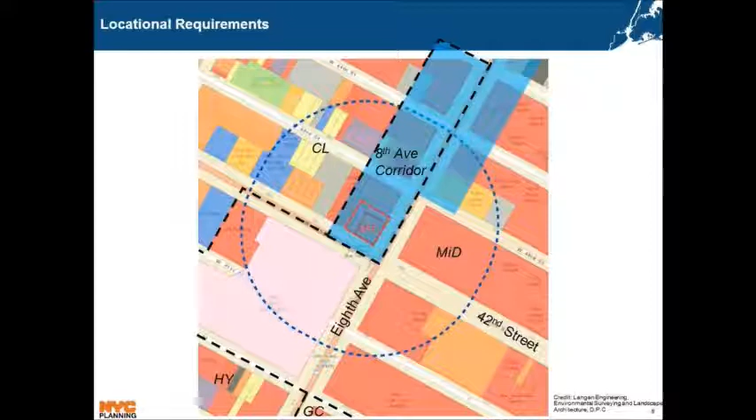For the recommendations: at its full board meeting on July 26th, Manhattan Community Board 4 voted in favor of a resolution recommending approval of the application. On August 14th, the Manhattan Borough President issued a recommendation to approve the application.

And in the reasonable worst case development scenario, it did look at a larger sign. Okay, thanks. Other questions?

Okay, another item for what promises to be a jam-packed public hearing on Wednesday. Could someone please get Commissioner Knight back into the room?

The next item is number 10, page 786 for public hearing, a proposal for acquisition of a building for continued use of a daycare center in Community District 2, Brooklyn. Our presenter is Amrita Mahesh from the Brooklyn office, item number 10, page 786.

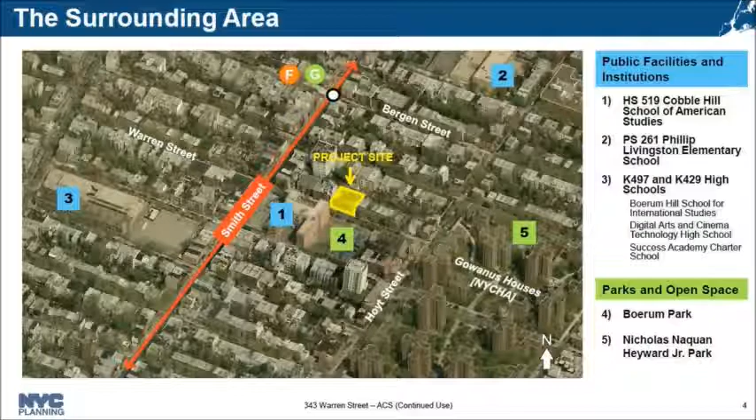on Warren Street between Smith and Hoyt Streets. The project site is mapped with an R6B zoning district. The building is privately owned and has been leased by the city since 1974. The Warren Street Center occupies the entire two-story building, including the cellar and rooftop. These are images of the project site.

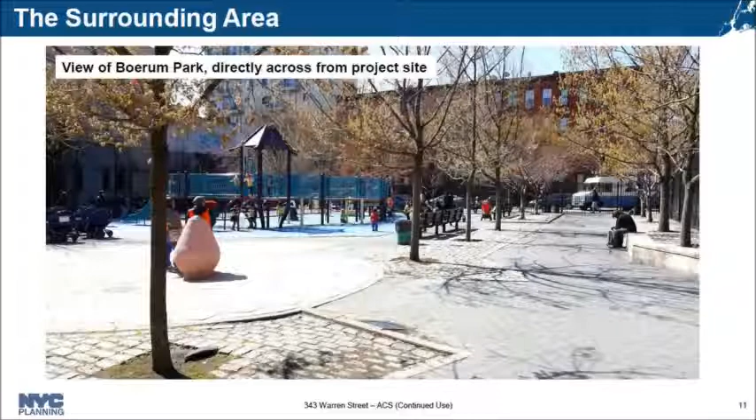This application was certified on June 19, 2017, and was duly referred to Community Board 2 and the Brooklyn Borough President. On July 10, 2017, Community Board 2 submitted a letter waiving review of this application, citing that the Community Board's district office has received no complaints regarding the facility. On July 25, 2017, the Brooklyn Borough President held a public hearing and issued a recommendation to approve the application without modifications or conditions. Additional recommendations were regarding lease renewal terms and streetscape improvements.

That concludes my presentation.

Questions from commissioners? Yes, Commissioner Levin. I would just note that this has a very stark appearance on the street, like so many others, and the entrance is essentially invisible - it's down an alley sort of thing. And I wonder, given our last discussion about renewed attention by this agency to urban design issues, whether there's some help for this building.

What we are doing as a department is asking our urban design team to see if they can come up with some inexpensive suggested interventions so that as these come forward, we will have discussed the proposals, which will be presented to the commission with both ACS and DCAS. And in having spoken with the DCAS commissioner, she welcomes this input.

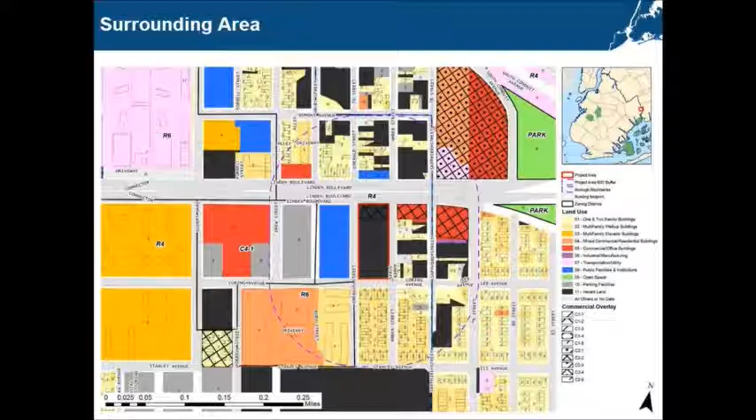The project area will consist of an entire block measuring 100,000 square feet, an area which is currently vacant. The project area borders on Linden Boulevard to the north, Loring Avenue to the south, and Emerald and Amber Streets on the east and west. Frontage along Linden Boulevard is zoned R4C12 at a depth of 100 feet, and the remainder of the block is zoned R4. As you can see, the surrounding area includes residential, commercial, and community facility uses in R4, R6, and C4-1 districts.

South of the project area are 1 to 6-story multifamily walk-up buildings. West of the project area is a medical facility, a movie theater, and then the Louis H. Pink houses, which consists of

22 8-story buildings, a NYCHA complex here. And then Linden Plaza, just to the northwest, is a complex with 5 17-story towers on top of a platform above the train yard. As well, there is 1 to 4-story residential and community facility and commercial uses north of Linden Boulevard.

Linden Boulevard is served by a local bus and express bus. But the project area is over a half mile from the Grant Avenue A station, the nearest subway station, and is outside the transit zone.

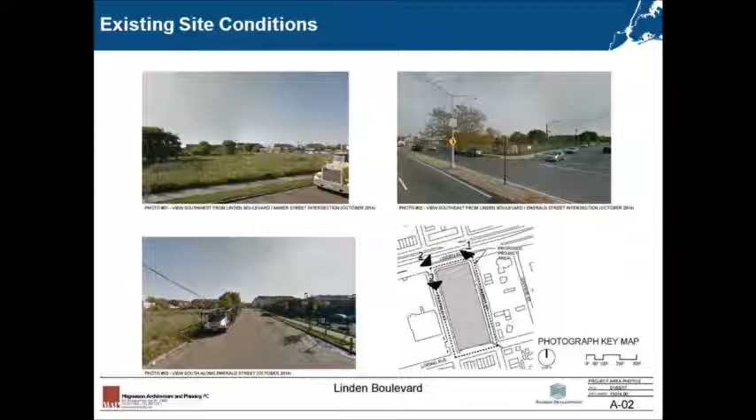As you can see, the entire block is currently vacant. There is one unique site condition of note, which is that Loring Avenue, the southern end of the block, ends at Amber Street, where a retaining wall separates the two streets. At the southwest corner, Loring Avenue is approximately 7.5 feet higher in elevation than Amber Street.

The applicant proposes to construct 4 new buildings for residential, commercial, and community facility uses on the project area around the border of Block 4496, the proposed project site. The proposed development will range in height from 12 to 8 stories and will contain just over 452,000 square feet of floor area for a total FAR of 4.52, and this would include 521 affordable housing units.

Building 1 will be 12 stories with 234 units, as well as retail at the ground floor. Building 3 at the southern end of the block would be 9 stories with 76 housing units, as well as community facilities at the ground floor.

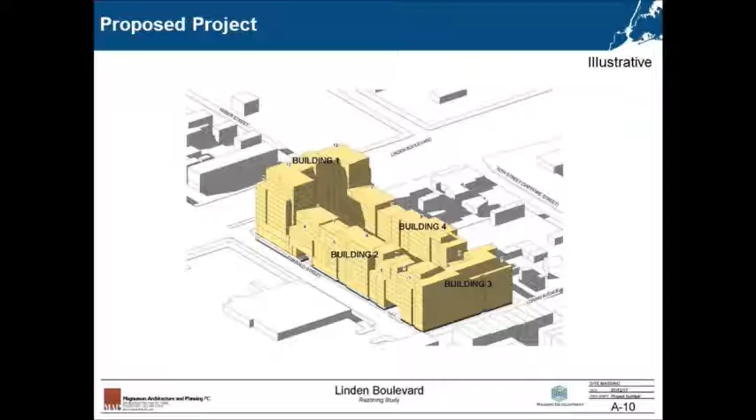And then buildings 2 and 4 at the mid-block would rise to 8 stories with approximately 100 dwelling units each. Building 2 would have just over 7,700 square feet of community facility space at the ground floor. This would potentially be a daycare.

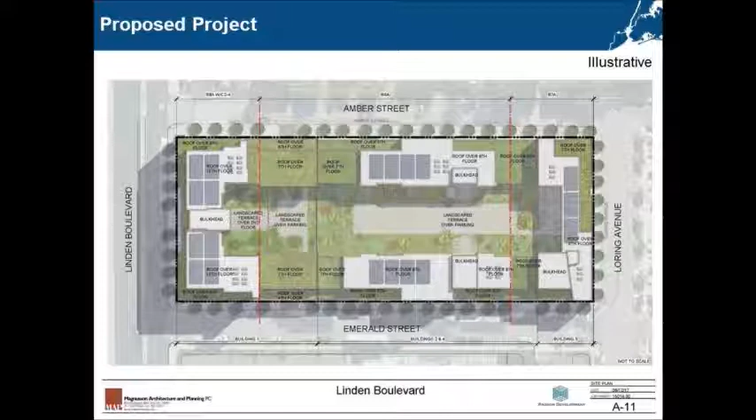The proposed project would include 16,000 square feet of open space in the form of landscaped roofs and terraces, as well as accessory parking for 100 cars in structured parking at grade.

The applicant is seeking financing for this proposed 100% affordable housing project under HPD and HDC's Extremely Low and Low Income Affordability Program, ELLA, as well as HPD's Our Space Initiative and the Mixed Income Program, Mix and Match.

The proposed development requires 2 actions: 1, a zoning map amendment, and 2, a zoning text amendment to designate the project area as an MIH area.

The proposed zoning map amendment would change the zoning district on the northern portion of the site at a depth of 100 feet from R4 to R8A C2-4, would change the mid-block from R4 to R6A, and then the southern portion of the block at 100-foot depth from Loring Avenue from R4 to R7A.

The proposed residential districts permit residential and community facility uses, and then commercial uses would be allowed along Linden Boulevard within the commercial overlay. The proposed districts would allow a maximum FAR of 4.52 across the entire site.

The second action is a proposed zoning text amendment to map mandatory inclusionary housing on this site, in which options 1 and 2 would be applicable. The applicant proposes to use option 2. Under this option, 157 out of 521 proposed dwelling units would be permanently affordable to households at an average of 80% AMI, while the entire project would be affordable per regulatory agreements.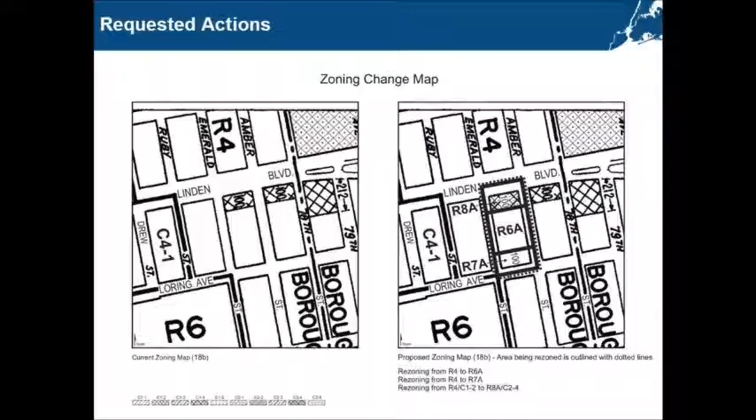I just want to make sure I'm understanding the recommendation from the community board about the parking compared to what was originally proposed. It seems the community board understands that the developer's commitment is for subsurface parking, but actually it's at grade—they're developing the parking at grade and building above. So that's what the developer is proposing, but the community board's recommendation specifically says subsurface. Is that a misunderstanding by the community board, or I'm trying to understand what was said.

My understanding is that subsurface parking would be very difficult here because of site conditions—there are a lot of grade issues. I'm not actually sure, but we could try to find out more and have them respond at the hearing. I also know it'd be pretty costly, especially for a project with this level of affordability.

Commissioner Levin: I was just hoping it would be helpful if we could have these recommendations before the hearing—both this borough president's recommendation and the one from the Manhattan Borough President, which is still awaited. It's easier to get them by email so we have a chance to review. We'll definitely be emailing that as soon as possible after this session, as soon as today when we can get back to the office. We want you to have time to review it—it's pretty lengthy.

Commissioner Marin: I just want to question the parking. I see there's a landscaped terrace over it, so it's not subsurface, but it is covered. What accommodations are being made to vent that parking? I'm not sure about the venting of the parking—there's actually parking at grade with the residential above, and there will be a landscaped courtyard in the middle above that parking, but I'm not sure about the venting.

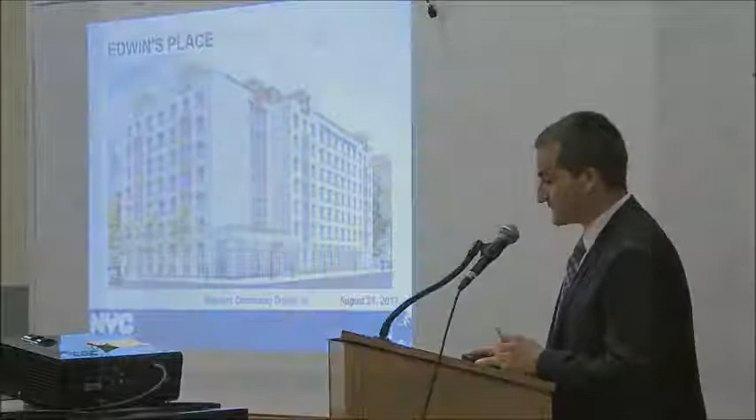Item 12, page 860. Good afternoon. This is an application by the New York City Department of Housing Preservation and Development for UDAAP disposition, zoning map and zoning text amendments, and a zoning special permit to facilitate development of a new 8-story mixed-use building containing 126 units of supportive and affordable housing. The project area is in western Brownsville, a neighborhood in eastern Brooklyn within Community District 16. It consists of one tax lot making up a full block front of Livonia Avenue between Howard Avenue and Grafton Street. The surrounding area is primarily residential, with retail on East 98th Street and Livonia Avenue. The project area is owned by HPD and is currently vacant.

As we can see in the aerial, the elevated 3 line runs along Livonia Avenue and turns onto East 98th Street. The project area is well served by public transit—the 3 line station is located adjacent to the project area, the Saratoga Avenue Station.

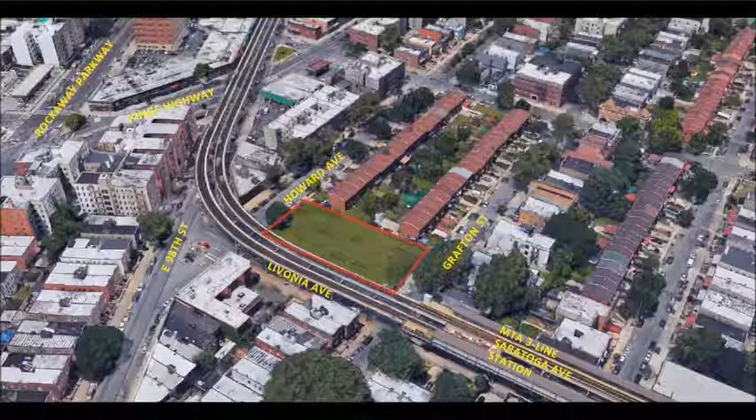The proposed development would be an 8-story mixed-use building containing 125 units of supportive and affordable housing, one superintendent's unit, as well as cellar office space for delivery of on-site support services for residents, and leasable ground floor space fronting on Livonia Avenue. At least 60% of the units would be supportive units for the formerly homeless, with the remainder affordable for individuals and families with incomes at or below 60% AMI.

So this view is with the elevated infrastructure in front of the building.

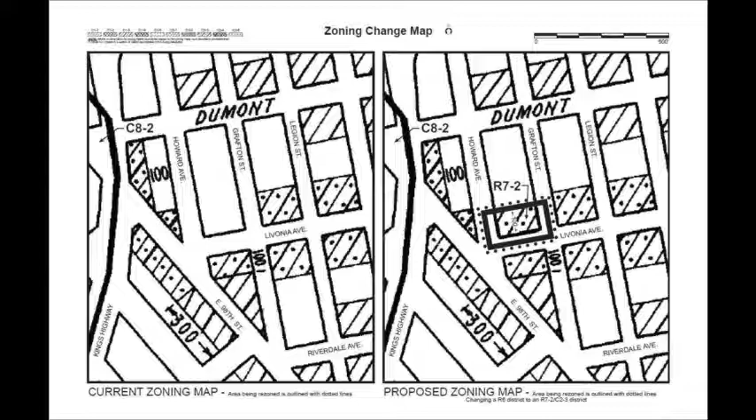The actions requested by the applicant are a zoning map amendment to amend the R6 district to an R7-2/C2-3 district, a zoning text amendment to map a mandatory inclusionary housing area with options 1 and 2, and also the urban development action area designation, project approval, and disposition of city-owned property. Also the zoning special permits pursuant to zoning resolution 74903, which allows the floor area for this project. The FAR would be increased from the 3.44 that's allowed as of right for this use to the 4.79 that's being proposed by the applicants.

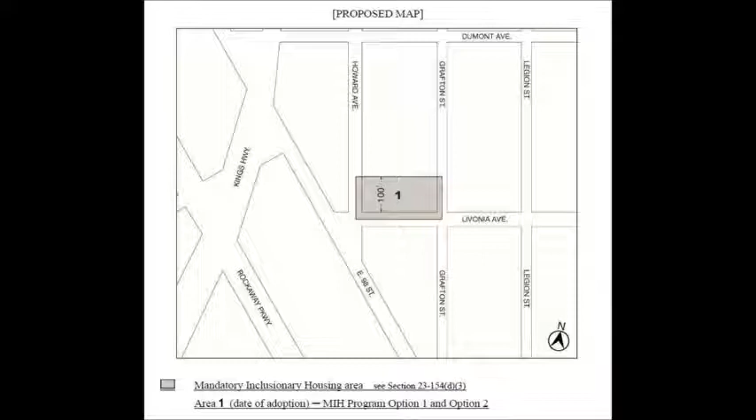There was a question at certification about the unit mix, so I've provided it within the presentation as well as in the briefing package. So the supportive and affordable units would both range from studios to 3 bedrooms.

Community Board 16 held a public hearing and voted to approve with no conditions, 21 in favor, 0 opposed, 1 abstaining. The borough president submitted a recommendation of approval with no conditions, however, with several requests listed.

The first two requests are of the applicant, particularly the project sponsor. One would be to rent the ground floor space to local arts groups and community organizations, and another to include bioswales as part of the builder's pavement plan.

The third is a request that DCP consider upzoning all of Livonia Avenue in Brownsville to R7D or C4-4L, in addition to a portion of East 98th Street. The final request is that New York City Transit advance construction on the free transfer improvements to the Livonia Junius station. I'll take any questions.

Thank you. Questions from commissioners?

The proposed rezoning area consists of 3 tax lots: Lot 100, Lot 104, and a portion of Lot 1. Lot 100, the proposed development site, is a 19,524 square foot irregular L-shaped lot and is improved with a 5-story, 114,000 square foot public storage facility. Lot 104 is at the corner of the superblock, and it is improved with an 8-story, approximately 65,000 square foot community facility used as a homeless shelter.

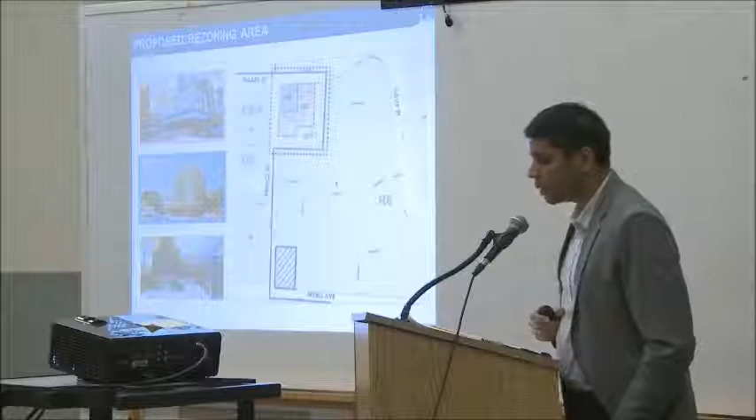The small portion of NYCHA's campus on Lot 1 that's included within the rezoning boundary is an underutilized fenced-off open space and a surface loading area, which is used by the storage facility under a licensing agreement with NYCHA.

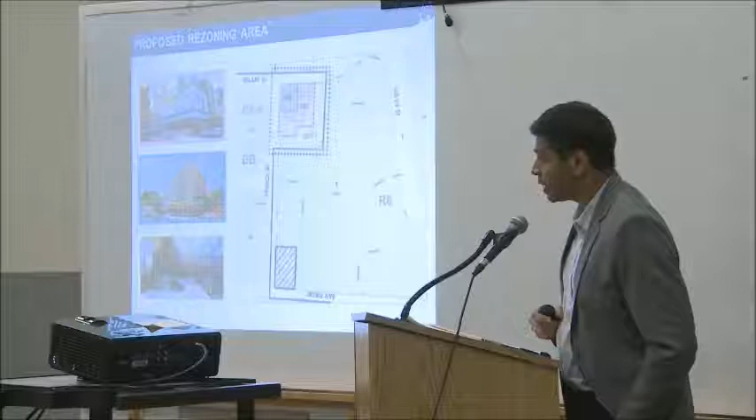The proposed rezoning area is directly adjacent to the special downtown Brooklyn district and is mapped entirely by an R6 zoning district. This non-contextual district allows for medium-density residential and community facility uses and typically results in buildings between 6 to 11 stories in a tower in a park setting.

The private application is proposing to develop a new 21 to 23-story, approximately 234,000 square foot mixed residential development. The project would include 220,000 square feet of residential floor area with a total of approximately 262 units, of which 79 would be permanently affordable, and approximately 13,700 square feet of ground floor retail.

The project would have a 1-story retail base with a 21-story, 212-foot high residential tower fronting on Prince Street and a 23-story, 235-foot high residential tower fronting on Tillery Street. The retail base would have entrances on Tillery Street and Prince Street, along with some entrances facing NYCHA.

Since certification, the applicant team and the NYCHA Tenants Association have come to an agreement to provide an open space that's landscaped on the eastern side of the development between the NYCHA campus and the proposed development.

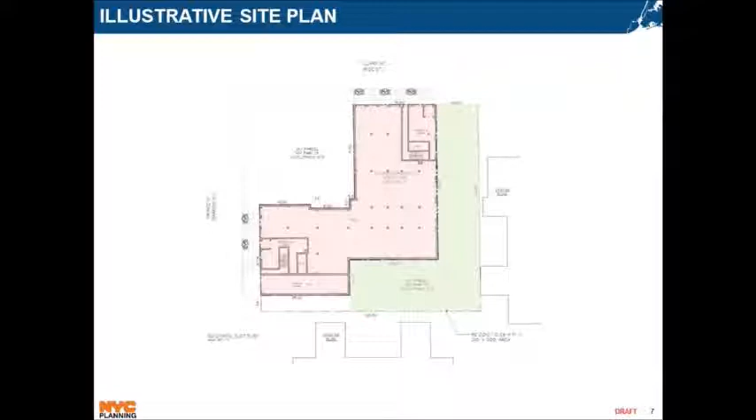In order to facilitate the proposed development, the applicant is proposing a zoning map change and zoning text amendments. The applicant is proposing to rezone the existing R6 to a C6-4. The zoning boundary would extend the existing C6-4 eastward. The C6-4 district is a high-density commercial, residential, and community facility district with a maximum FAR of 12 with MIH.

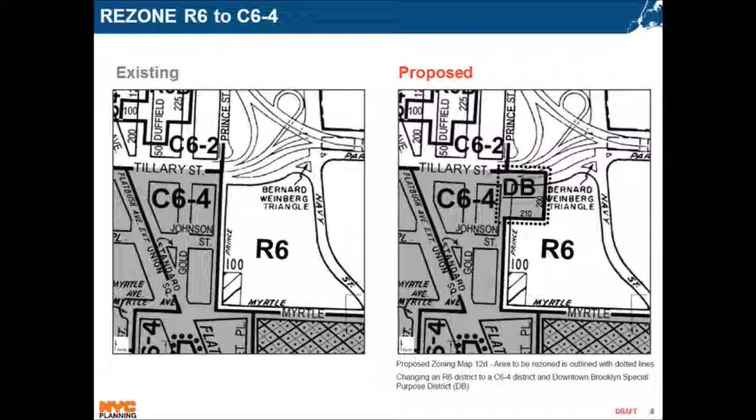Pursuant to quality housing regulations, the C6-4 district has a maximum base height of 155 feet and a maximum height of 235 feet. The applicant is also proposing to extend the special downtown Brooklyn district, as shown here.

Additionally, the applicant is requesting to extend the Flatbush Avenue extension height limitation area with a height restriction of 400 feet over the rezoning area.

Lastly, the applicant is requesting to designate the proposed project areas as a mandatory inclusionary housing area with option 1, requiring 25% of affordable units with an average AMI of 60%.

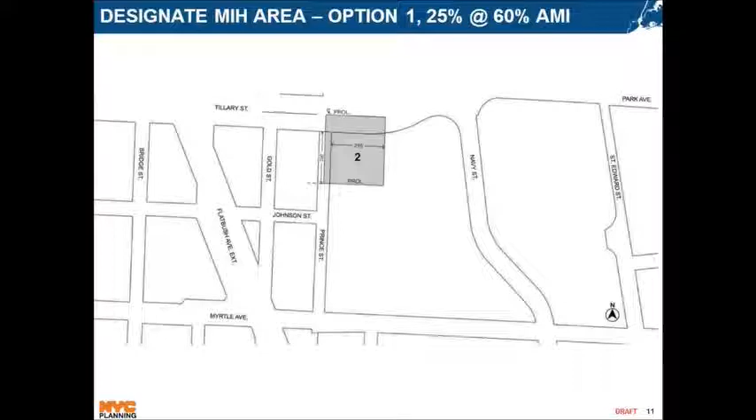The proposed actions were certified and referred out by the department on June 19th. At their general meeting in June, Community Board 2 authorized the Executive Committee to act on the board's behalf while on summer recess. Community Board 2 held a public hearing on June 21st, and on June 26th, the Executive Committee voted to approve the zoning change and the zoning text amendments, 8 in favor, 1 opposed, and 0 abstaining, with a condition requesting that the applicant team provide written commitment to the amenities requested by the Ingersoll Houses Tenants Association.

Subsequently, the development team has provided written commitments to ensure that the proposed landscape open space adjacent to the proposed development would be open and accessible to the Ingersoll Houses residents, to provide an enclosure and refrigerated trash containers to accommodate Ingersoll House's refuse, and to include commercial uses along the ground floor that would be beneficial to Ingersoll Houses, such as a daycare facility and/or medical offices.

On July 25th, the Borough President held a public hearing, and there was one speaker against the application. On August 16th, the Borough President recommended to approve the application with conditions that include that the applicant legally provide for the following: create a framework and agreement with NYCHA to execute the landscaped open space and the refrigerated trash containers.

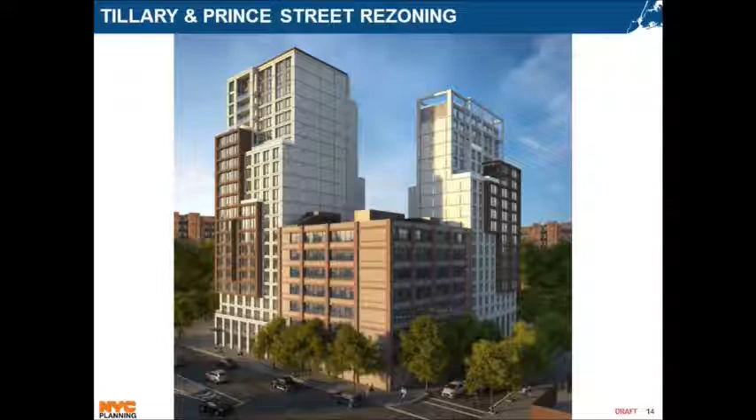I have to say that it was a pleasure to end the pre-hearing items on one that bespeaks such a good relationship between the applicant and the NYCHA residents, leading to what looks to be a felicitous result for the NYCHA residents. Questions from commissioners?

Commissioner De La Uz: Can I just ask a follow-up question about the refuse and the recommendation that it also be refrigerated? Do you have any background on that you can share? Response: I think it's just a type of container that can prevent that smell and keep it sort of protected, but the applicants can speak to the details of that.

Commissioner Levin: That's potentially a huge commitment by the developer, so we'll find out more. I hesitate to ask for more paper, or maybe I missed it as I poured through the 900 pages, but I don't think we got a copy of the Borough President's recommendation. Response: Yeah, it had come in late, but I think you guys should have gotten paper copies today. We can follow up and make sure we get it. Thank you.

Other requests for more documents? I think all of us struggled with our weekend homework.